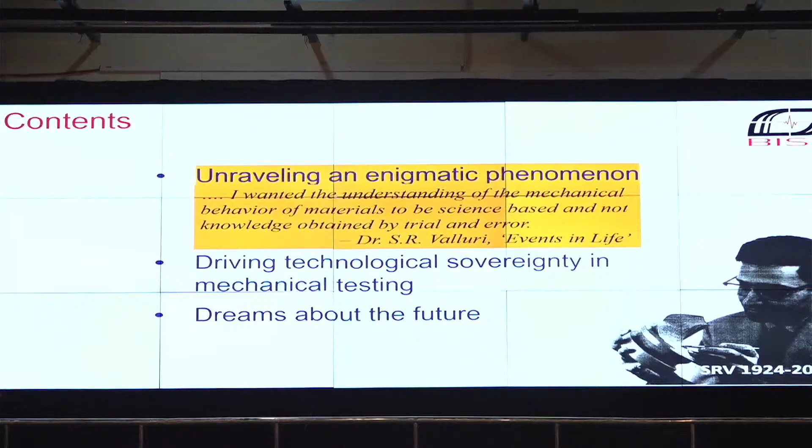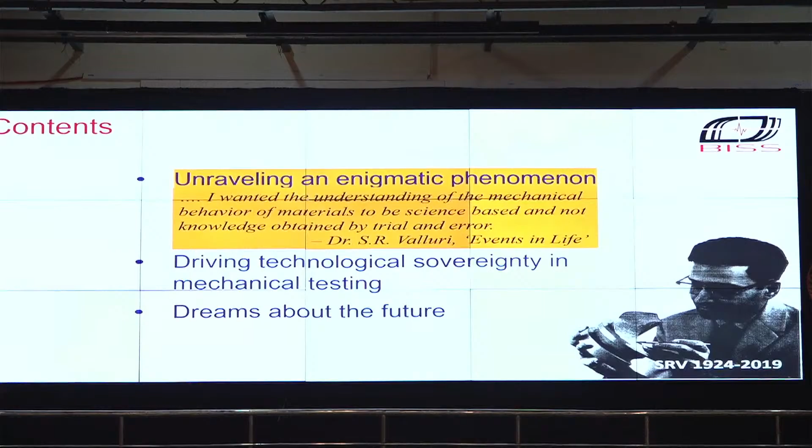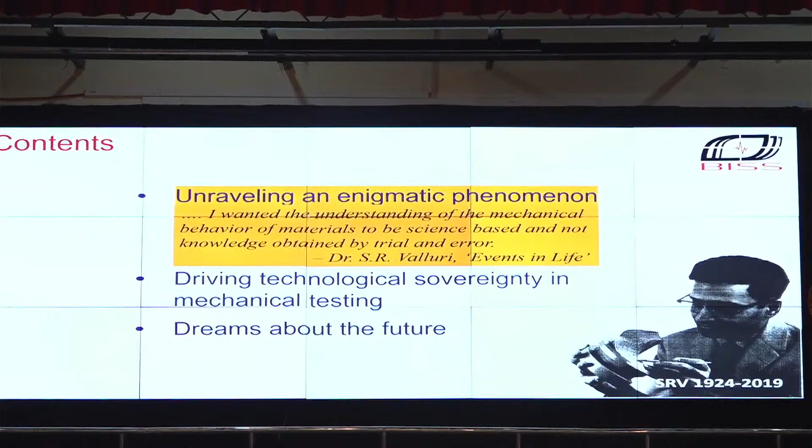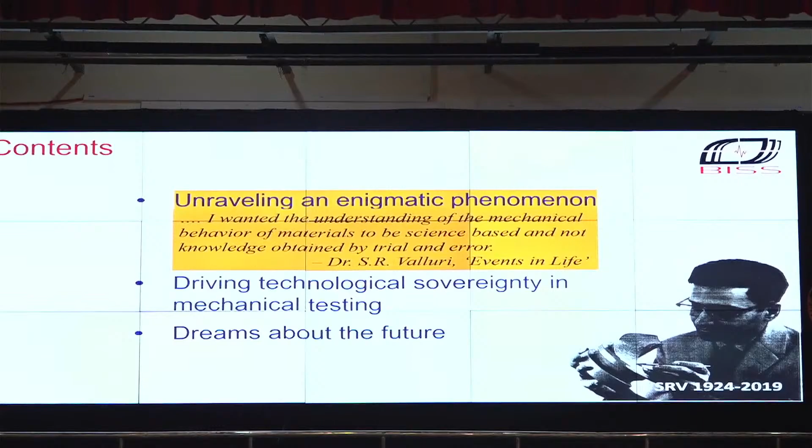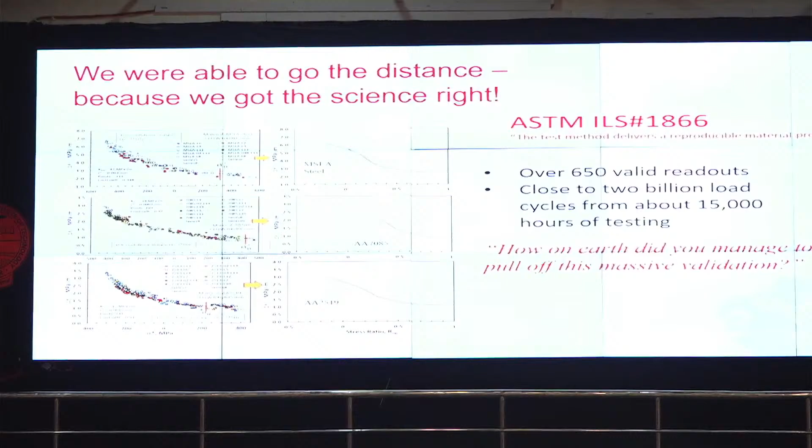When I reported these results at the ASTM meetings in spring, one of the veterans over there asked me, how on earth did you manage to pull off this massive validation? The answer lies in the enormous support that we enjoyed in this process, without which we would not have been able to do this work.

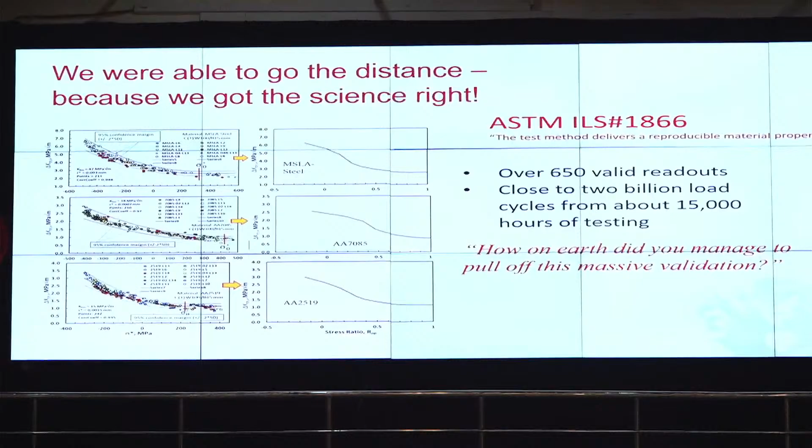Because each of these readouts that you see on the screen, it took about 3 million load cycles and involved a total of 15,000 hours of testing.

The American Society for Testing and Materials assigned it a number, ILS#1866. That study is complete, and very importantly, because of the science behind the method, we are able to translate the data on the left to relationships on the right, which engineers and researchers can use, as a relationship between threshold property of a material and applied stress ratio.

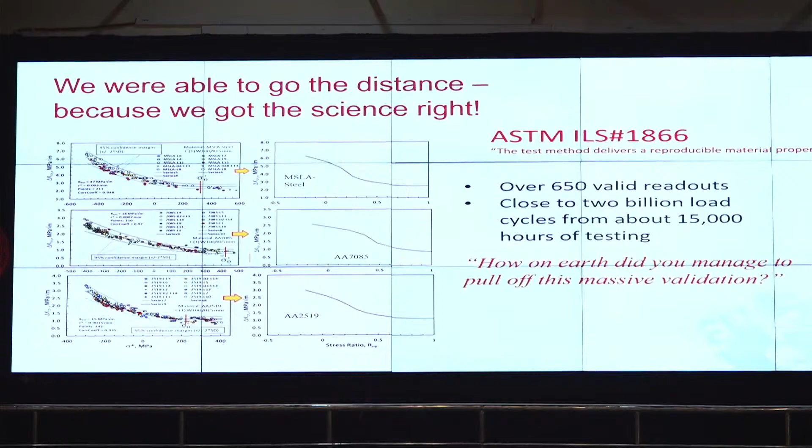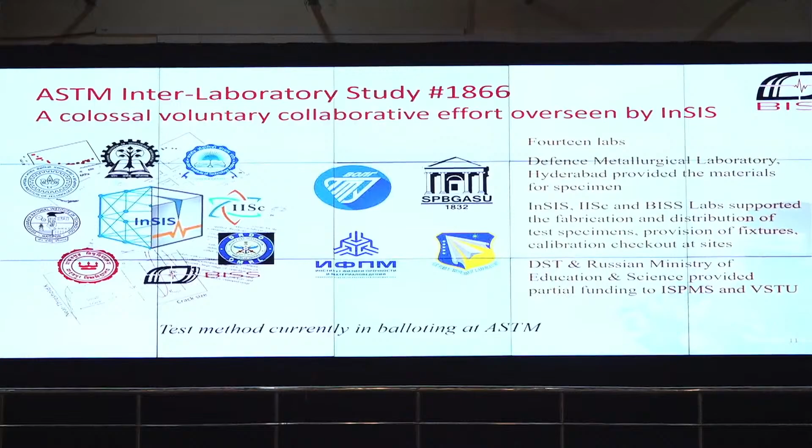This study is a supreme example of voluntary participation, of selfless support of people around the world. I could spend a lot of time just describing how much help we got from people in India, in Russia, and in the US. One of the participants was VNIT, and I'm really glad we're having this conference here. I deeply appreciate Professor Peshwe, Atul, for the help he gave, because each participant was given 2 materials to test, and everyone did an outstanding job.

And that's our team. Not all of them, of course, could do this because then we would have gone out of business. But the tech support team from BISS was responsible for making sure that everybody got their specimens, their fixtures, their calibrations done, the software installed, and this is a huge amount of work.

But amazingly, there is a connection between this team and Dr. Valluri. The connection is that he might have actually inadvertently planted the seed for our team way back in 1982, which goes back more than 40 years.

So we had this battery of machines, and by the way, we did a lot of work, I'm sure Raghu will remember, on L168, which came from here, from the Ambajari plant, for type certification. We also did type certification work. I remember Prakash used to come and ask questions from ADA, along with Mr. Sridhar Murthy.

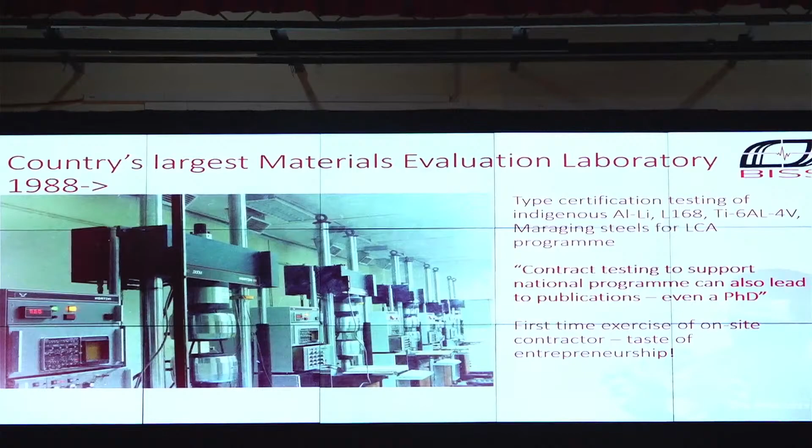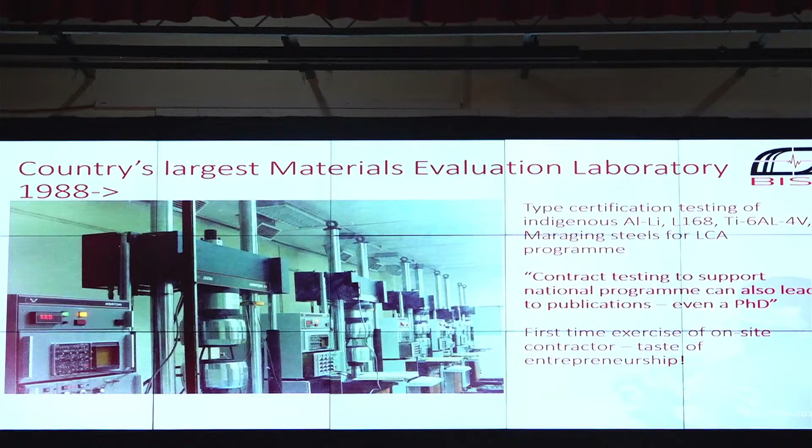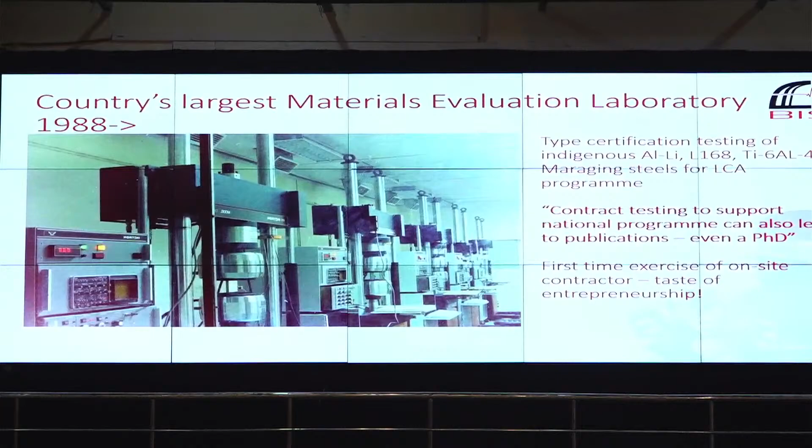Interestingly, one of the youngsters who took charge of the contractorship, they were all my project students from local colleges. So I told them to set up their own company, and perhaps they were my guinea pigs so that I could go and set up my own company afterwards. Because these guys then became the chap who started the on-site contractorship. He became a kind of a mini Bill Gates in Bangalore, a local oligarch in IT. I think that was the exposure because of working with government. He got some licenses, so his entrepreneurship really took off.

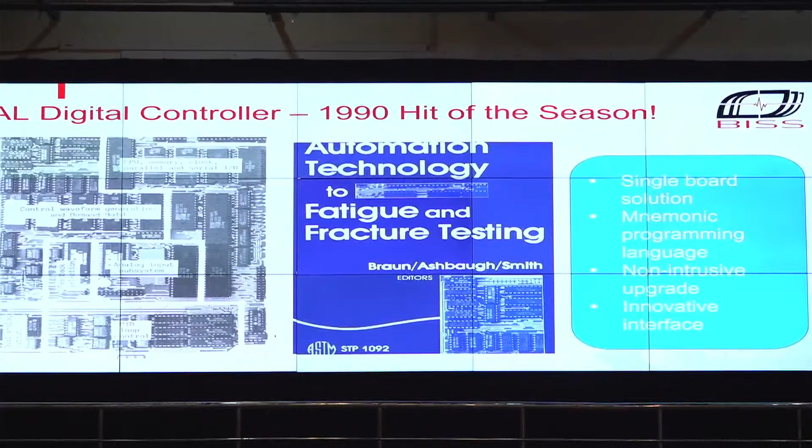This was a tremendous experience, and I want to cite it today because this was not the time when people knew the word startups. This is all new jargon that we're hearing today, of incubation of startups and things like that. But this took off, and it took off in hardware.

The controller itself made its way also into an ASTM STP, and for us it was a great honor that the picture of our single print, single board control system appeared on the cover of that ASTM publication, which contained all the papers that were presented at an automation symposium. I think that tells you how much you can move forward in problems related to structural integrity, working with industry, in a way that you cannot possibly do in many other areas.

The company that was set up in 1992 went on to do a tremendous amount of development work in a variety of test systems. I've just highlighted 3 of them over here because they are of particular interest probably to some of you.

The exercise itself would not have been possible without the support that we enjoyed from most of the people that we worked with. Unfortunately, many people would tell me, servo hydraulics, computer control, it has to be imported, don't get involved with this kind of thing, just go and do something at your level. Don't come and talk to us about thermomechanical fatigue testing, about shake tables. This is not for you, this is for those 1 of 4 or 5 companies in the world, only they can do it, and we only trust one of them, so we're going to work with them. That was the approach I would hear.

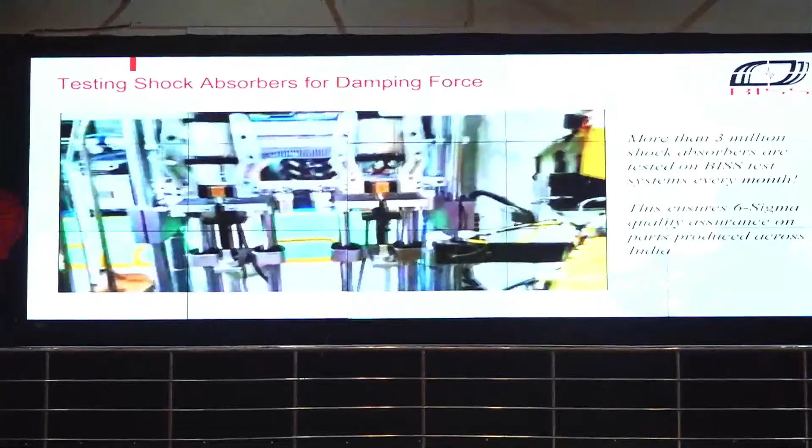You look at that team of youngsters sitting there and wonder how they can do it, but it can all be done. This is possibly the most impactful thing we have done, though it has very little to do with science and very little to do with the technologies of structural integrity. This is a shock absorber test system.

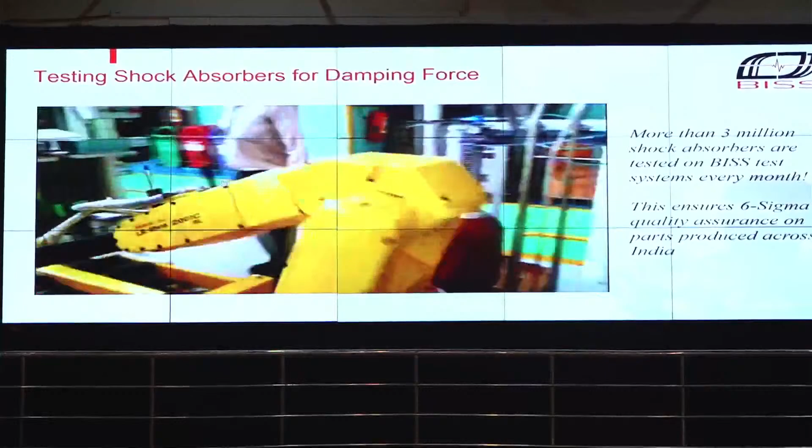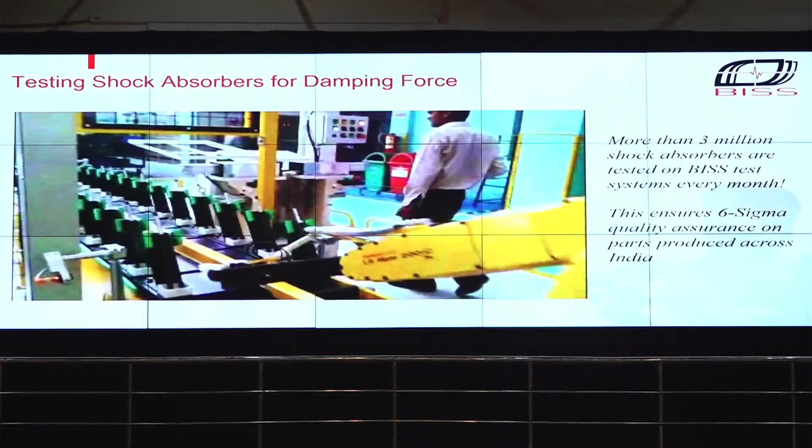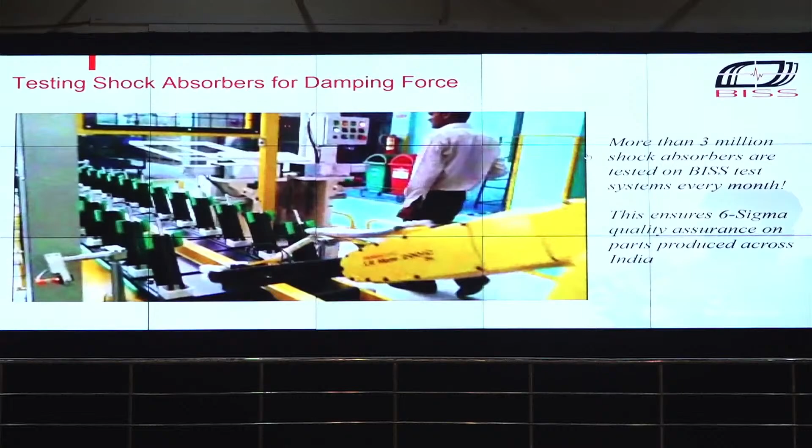Why do I consider this to be the most impactful thing we've done? That's because 3 million shock absorbers go through our machines in India before they are packed and sent to automotive manufacturers, whether it's a 2-wheeler, 3-wheeler, 4-wheeler, railway wagons, locomotives, doesn't matter. Chances are, if you are riding a 2-wheeler or a 4-wheeler, your shock absorber spent a couple of seconds on our machine. I think that's a matter of great pride, because that increased the quality of Indian shock absorbers to the 6 sigma level, which would not be possible unless every part is tested. And if you're going to test every part on an expensive imported machine, your business isn't going to be competitive. That is the equation. So we have to focus on technology development.

We set up the largest private lab in the country, which is the only lab that is NADCAP certified for both metals and composites. So we are able to undertake a lot of contract testing for the aerospace multinationals and for DRDO. I believe our lab is a hugely successful platform for our own young engineers to learn. I take great pride in the fact that we take in interns. We love to have students. We have had a lot of students from overseas who come to do their experiments for their masters and their PhD, and they learn a lot about test equipment as well.

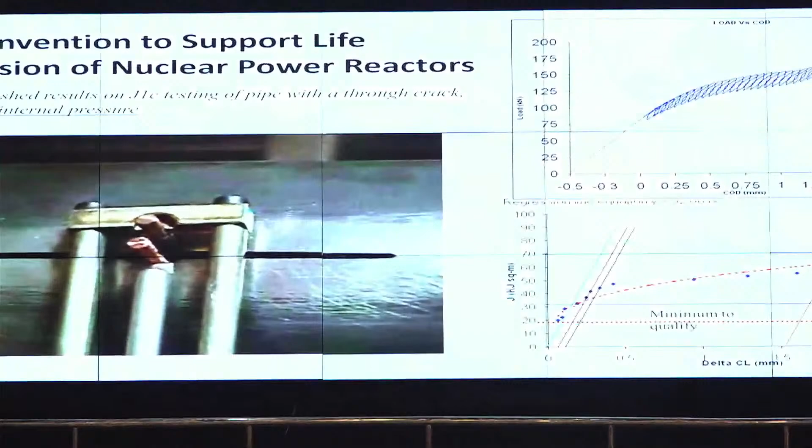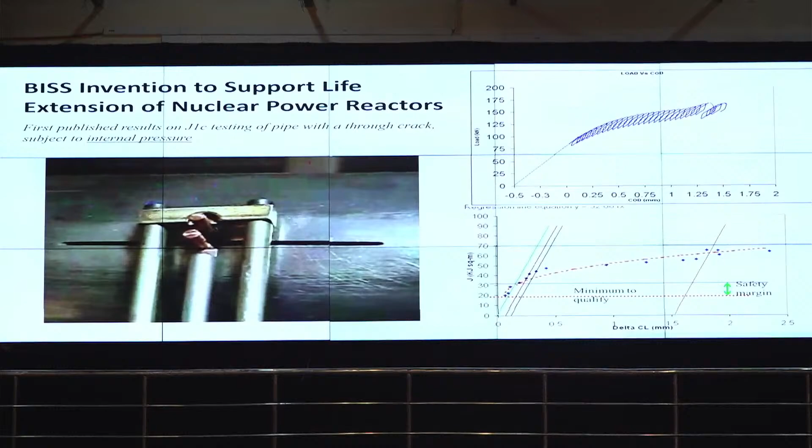Based on this technology, the zirconium niobium pipes which carry the primary coolant and the fuel element in our nuclear power reactors are being tested for residual strength. But the science of it comes from the fact that on this rig, we got the world's first published results on a J-1C test on a pressure vessel with a through crack, which at that time was something unbelievable. In fact, I remember meeting Jim Newman, a close friend and probably the world's top expert in fracture mechanics, who developed all the equations to calculate the crack size from compliance.

He had developed the equation for a through crack in a pressure vessel as well. So I told him, Jim, we confirmed your equation works. And he said, how did you do it? It can't be done. I said, well, we did it. So there is a lot of science and technology, and you can write a lot of papers.

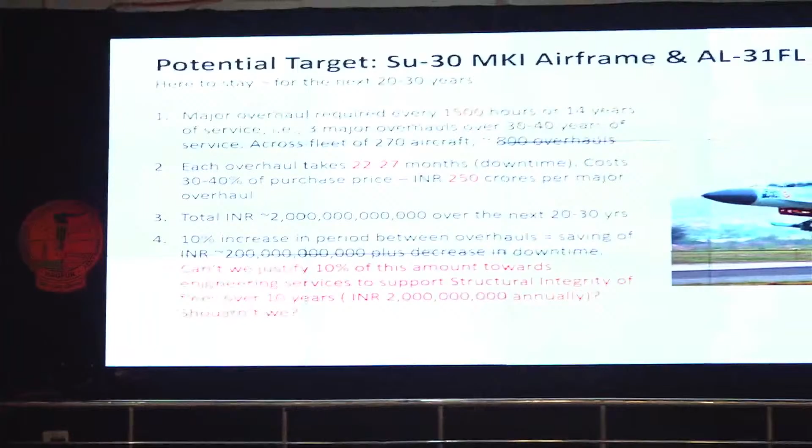Next slide. The best example of a target project is probably the SU-30 fleet, of which we have almost 300 aircraft in the country, expected to serve for the next 20 to 30 years. I just made these rudimentary calculations, and if I was a little younger, I'd probably start a company doing this.

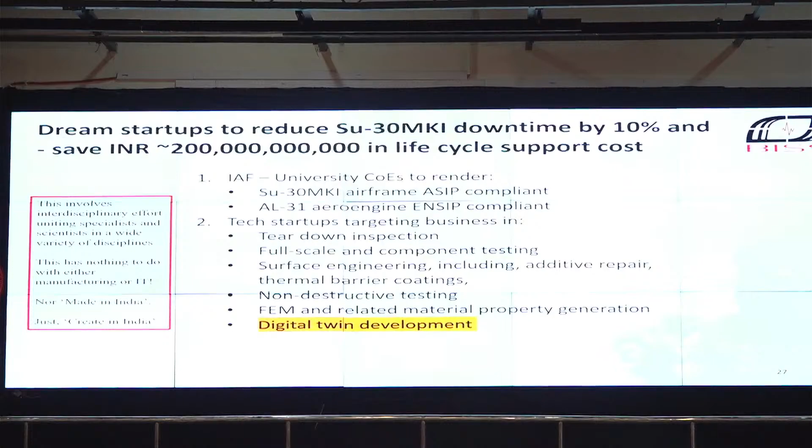Next slide. This is an interdisciplinary activity. It involves a lot of disciplines, and one of them is definitely digital twin development.

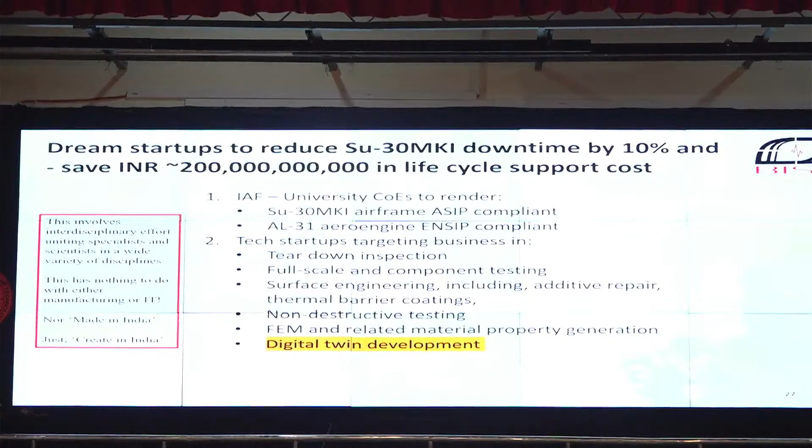And last night, next slide please, I dreamt that at the 2029 ASIP conference in the US, there is a paper by two authors from Nagpur: Squadron Leader Malkiyat Singh from the Maintenance Command and Professor Sushant Thakur, who had started his own incubated unit here at VNIT and was doing very well. Malkiyat was his PhD student, and they were presenting this work at the ASIP conference in the US. Given the title of the conference involving a top-end Russian aircraft, you can imagine all the parallel sessions were closed and everybody was sitting at this session listening to what Malkiyat had to describe about digital twin development for the SU-30. So that was a dream I had last night.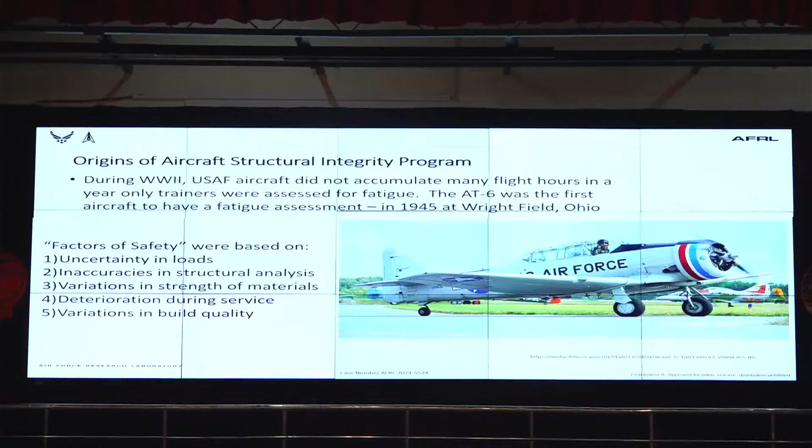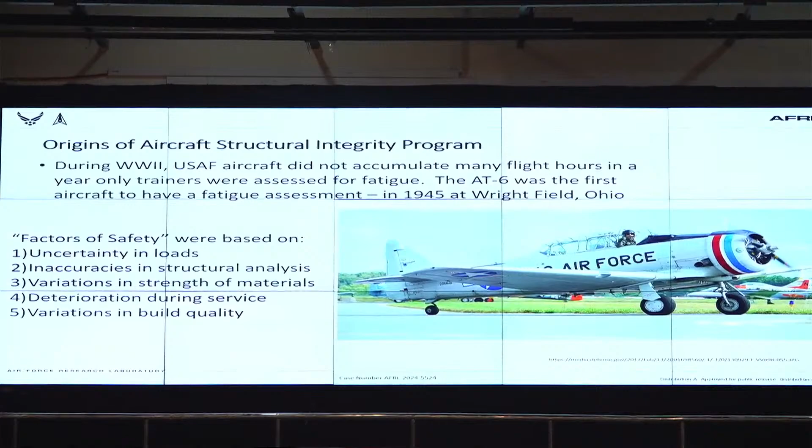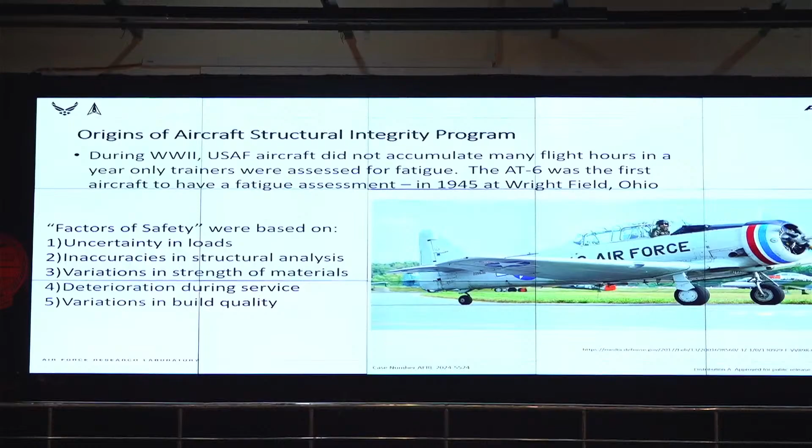So, the Aircraft Structural Integrity Program, or ASIP. If you look at how the Air Force was flying aircraft in World War II, we didn't have a lot of structural integrity problems. Our fighters were not lasting long, they were wearing out. B-17s were getting shot down all over Europe. The only aircraft that saw full life fatigue was our trainers. That aircraft on the right, the AT-6, was the only aircraft that actually saw fatigue damage, and that was the first example of a fatigue assessment for a U.S. Air Force aircraft, done at Wright Field in 1945. That's where I work now, at Wright-Patterson Air Force Base.

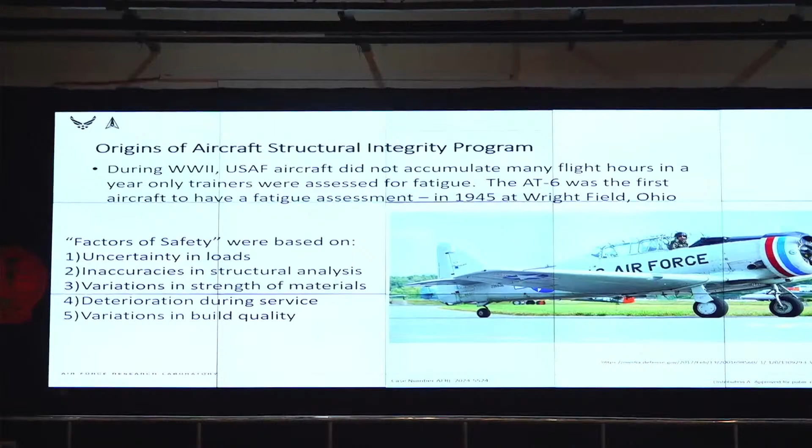And they had these five safety factors, things you have to consider when designing an aircraft, when ensuring structural integrity: What are your loads? How well do you know them? What are your inaccuracies in your analysis? Where are the errors in your structural analysis? How mature is your material? How variable are the material properties? You have to well characterize your material. How does the structure...